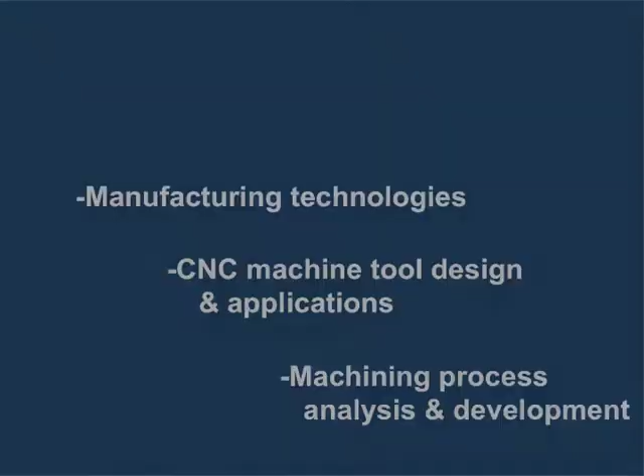The core objectives of the ARMS Lab encompass the following: to conduct practical research in order to contribute to society and industries by providing useful and relevant results to the field of manufacturing, where research topics must meet demands that come directly from industry, and to develop a win-win relationship between the ARMS Lab and its fellow collaborators in order to promote and share technological advancements in the field of manufacturing.

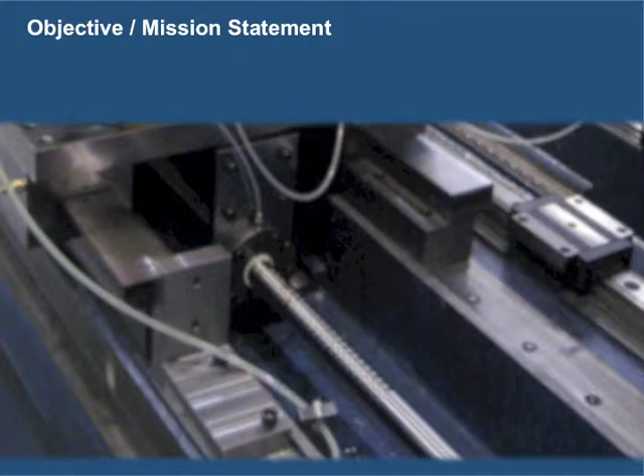To give students the opportunity to be interested in manufacturing research and machine tools by providing access to state-of-the-art equipment, knowledge, and technologies. To educate researchers through lab activities involving not only academic work, but through experience and opportunities that lead to the development of a strong sense of personal responsibility as professional engineers. And lastly, to give researchers the opportunity to work with industry leaders through internships and educational training.

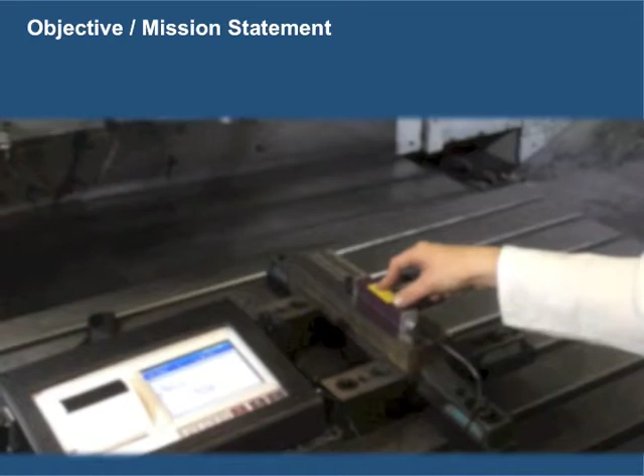The ARMS Lab was launched in January 2013 by Dr. Soshi. A fellow UC Davis alumni, Professor Soshi earned his master's and PhD from Davis from 2003 to 2009. While earning his PhD, Professor Soshi was also hired by Mori Seiki, where he worked as an engineer from 2008 to 2012, working on mechanical and mechatronic designs before moving to the production technology team, developing strategies and processes to reduce lead time and increase overall productivity related to machine tool construction.

Professor Soshi's current research interests include manufacturing systems and processes, CNC machine tools, mechanical and mechatronic design and analysis, high-performance machining, and the advancement of production technologies.

There are currently 3 full-time researchers working in the ARMS Lab. Nick Raymond received his BS in Mechanical Engineering from UC Davis in the summer of 2013. After earning his degree, Nick joined the ARMS Lab, where his knowledge and experience operating and programming machine tools has proven to be a vital asset. Nick currently works as a junior specialist in the ARMS Lab, working closely with Professor Soshi on ongoing research projects and assisting with day-to-day lab operations.

Kevin Browers is one of 2 master's students currently working in the ARMS Lab. Kevin's interests include machine automation and applications involving high-precision manufacturing. Kevin's current research includes implementing subroutines with Abaqus, the finite element program, that will allow the ARMS Lab to incorporate a machine tool spindle control system within pre-configured cutting simulations to better predict the effects of non-continuous cutting forces caused by dynamic changes in cutting speed.

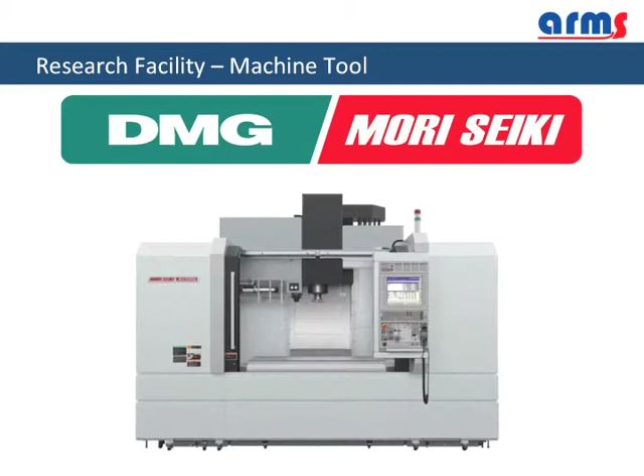Along with our office space facilities, Bainer Hall houses the large DMG Mori Seiki NV7000 3-axis vertical milling machine. The NV7000 is used to cut hard-to-machine materials like titanium alloys and nickel-based superalloys. Of particular interest is the modified spindle system developed by Professor Soshi, which has been installed on the lab's machine.

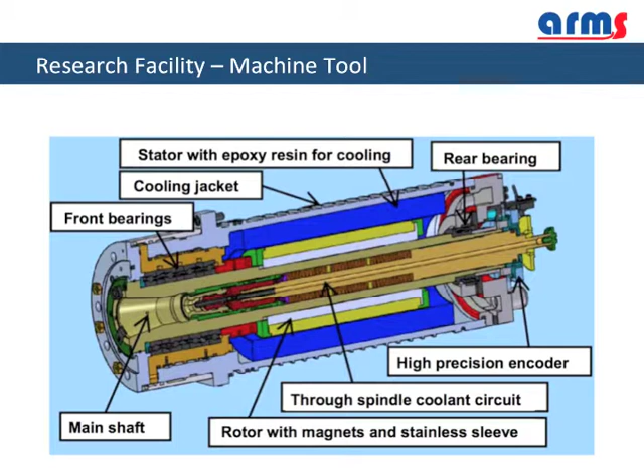While working at Mori Seiki, Professor Soshi developed a high-torque, high-power spindle system equipped with a synchronous motor for high-performance cutting of difficult-to-machine materials. The high-torque, high-power spindle system was fabricated from a permanent magnet synchronous motor coupled to a pulse-width modulator driver. An updated version of this high-torque, high-power spindle system has been installed on the ARMS Lab's NV7000, providing the lab with the ability to test various cutting conditions as influenced by the dynamic characteristics of the spindle system, which can be modified and tuned by adjusting the gain of the controller.

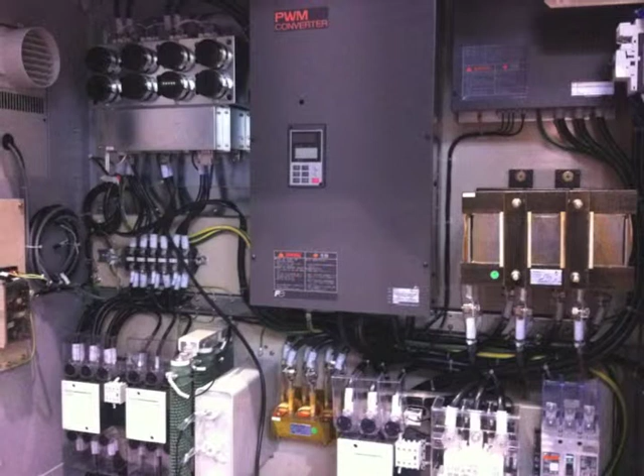Thanks to the open-source controller algorithm, the controller parameters can be easily modified to achieve maximum spindle performance, or the parameters can be adjusted to study the influence of spindle response on machining processes.

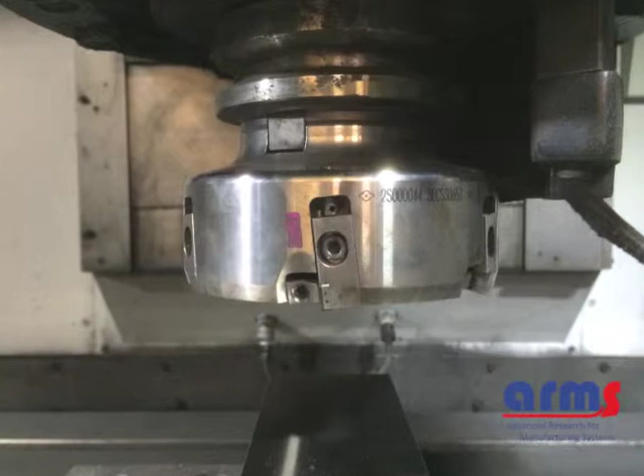The NV7000 is primarily used to cut hard-to-machine materials like titanium alloys and nickel-based superalloys. However, most recently the machine has been used to characterize tool wear when machining hardened cast iron during a feasibility test of a new production process.

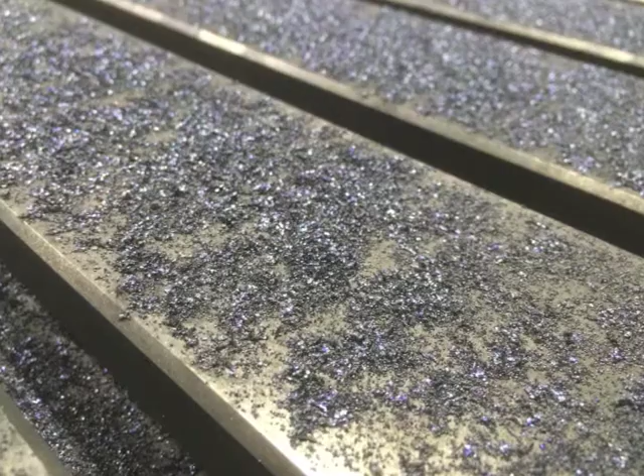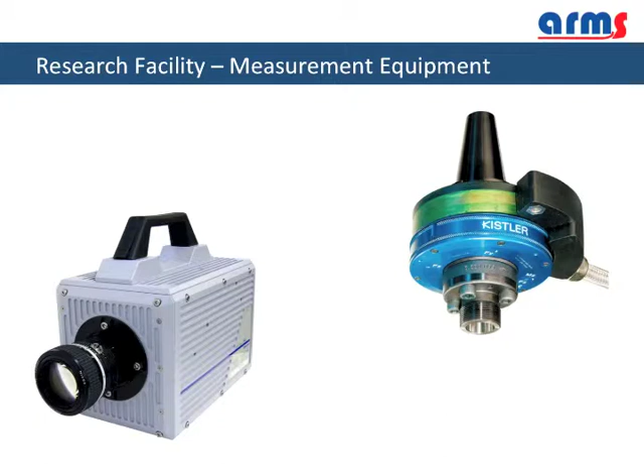Additionally, the ARMS Lab has access to an array of measurement devices used to document machining experiments. These include a high-speed camera by Photron, spindle dynamometer by Kistler, an accelerometer by Onosokki, radiation thermometer by Tokyo Seiko, a multi-channel data logger by Yokogawa, a power meter by Yokogawa, and a surf test by Mitutoyo.

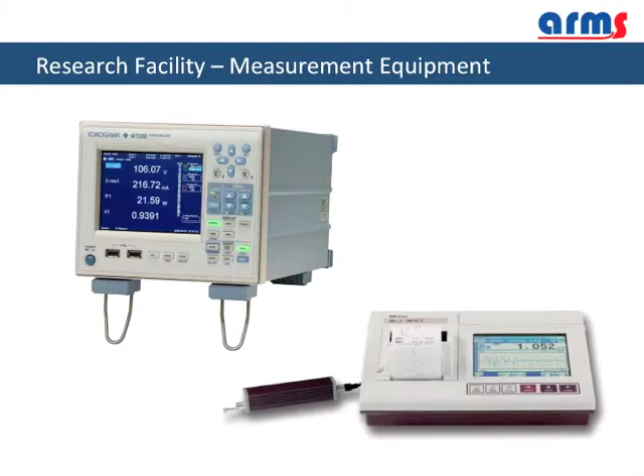The majority of these measurement devices can be used together simultaneously to log different aspects of the machining process in real time, as shown in the following video of a face milling operation.

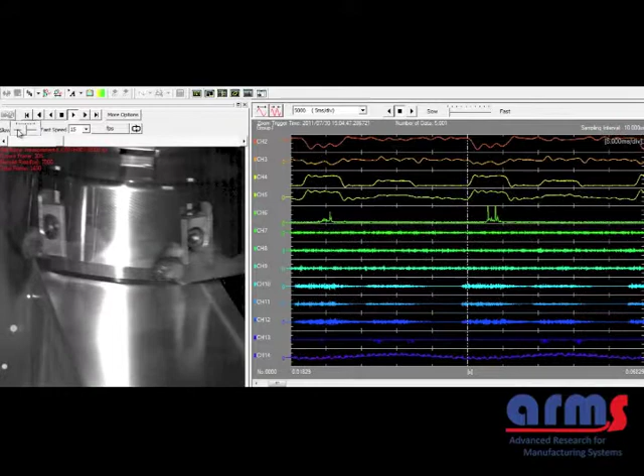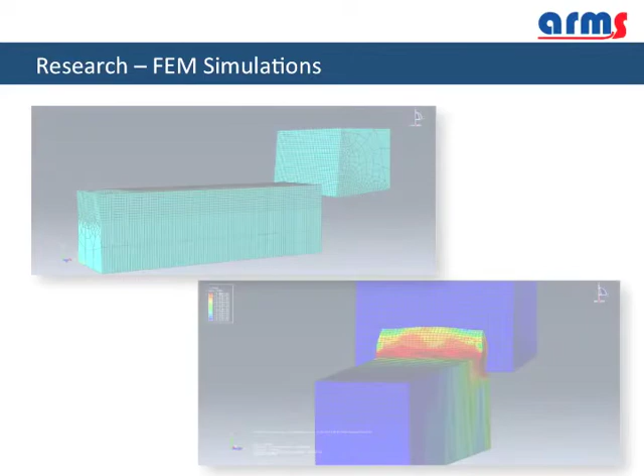The ARMS Lab is developing a model of the cutting process using the finite element method. Our primary motivation is to build a simulation which can shed light on the connection between the micro and system scale, highly dynamic processes that occur during metal cutting. We are using the Abaqus Explicit software package to develop our own finite element model.

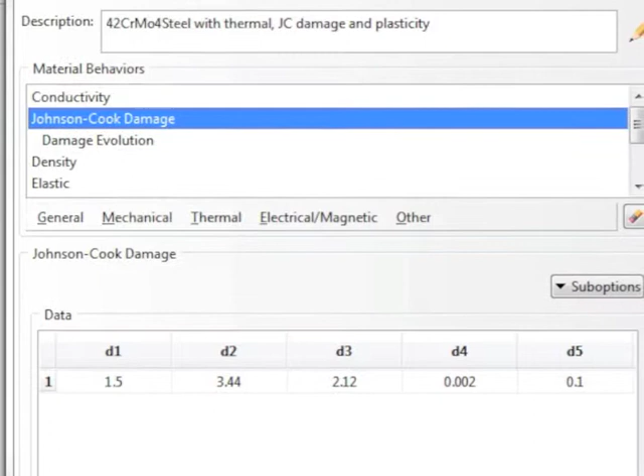In addition to the orthogonal and oblique cutting simulations in Abaqus, the ARMS Lab is also working to incorporate a subroutine that would incorporate a PI speed controller into the FEM cutting simulations.

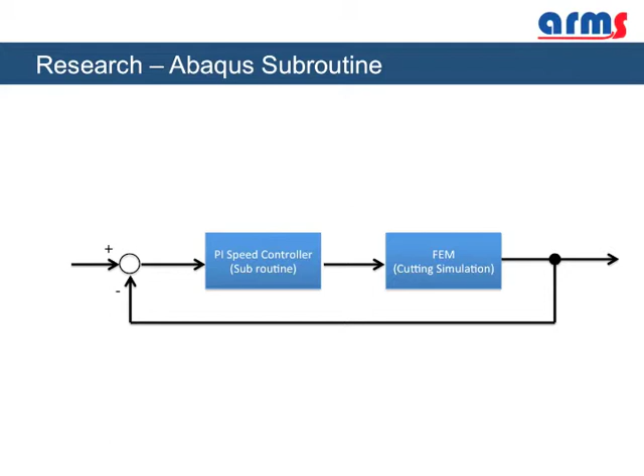A commanded cutting speed would be input into the program, where an actual cutting speed would be calculated from the previous operation. The speed controller would then compute and adjust the cutting speed, with the adjusted speed being fed into the FEM cutting simulation, and the speed change after the cutting event exiting the program.